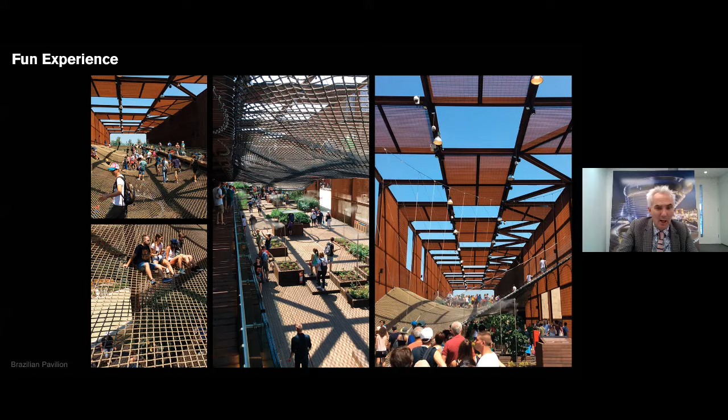So the first thing with any pavilion is a fun experience, an experience that you remember, an experience that you interface with in a fun way — a learning experience, a personal journey. As you're taken through the pavilion, it's important that you come away with a story, understanding the topic of the pavilion. Then there's the immersion of the pavilion, so you feel immersed in a new world, a world about the topic. And finally, a single message, a very clear, strong message from the architectural form, which inspires the question. In our case, that was mobility.

With this particular pavilion, it was really the end of a long journey with pavilions in the expos we'd done. In the Shanghai Expo in 2010, we started with a pavilion designed to be demolished following the expo, as many expo pavilions are. Partway through that process, the UAE asked us to retain the pavilion and whether it could be redesigned and transported back to Abu Dhabi. So we redesigned it, made it movable, and eventually it was moved back to Abu Dhabi. We saw that legacy program as very important.

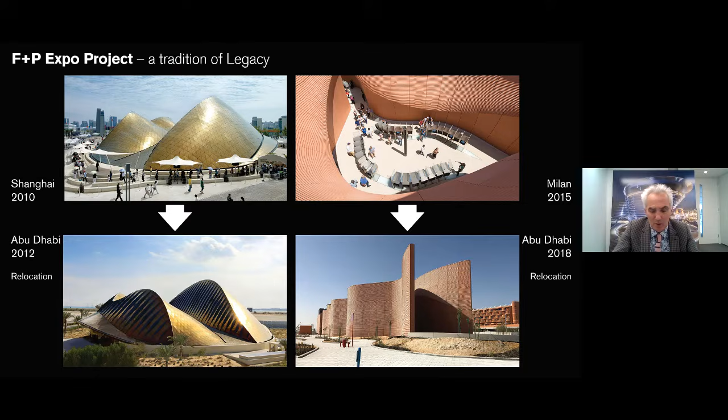The Mobility Pavilion site itself was two things for us. It was a great subject, one we were very interested in, and we think it's become even more topical as time has gone on. The mobility of people, the mobility of data - these have all become very relevant during the COVID period we've just been through.

The pavilion itself is located on the southern part of the site, in one of the highest points, so it looks back down onto the site, and is right next to one of the major entrances. When we were given the brief, there were three distinct areas: the physical world, the digital world, and the unified world.

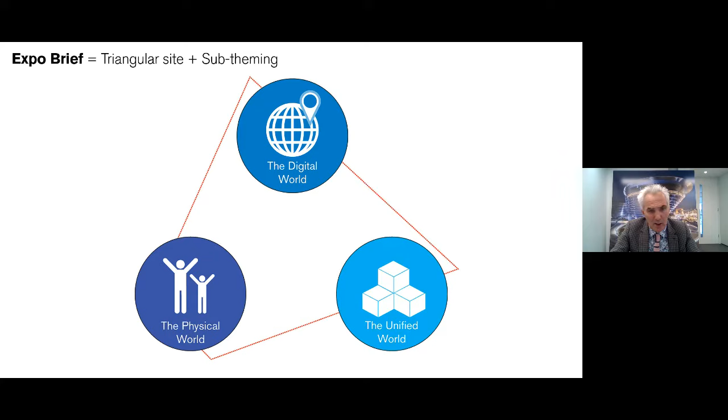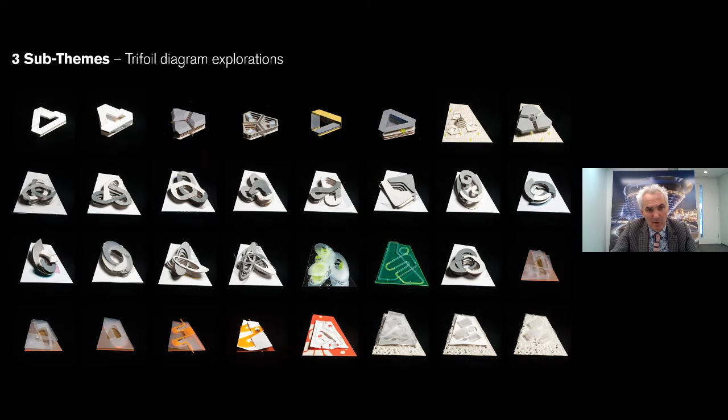With a triangular site, it led us to a trifoil building, creating three vessels, each housing one of the sub-themes of the pavilion. By working through numerous iterations, leading to this trifoil loop of mobility and movement through the building, we ended up with our trifoil form.

So the three legs of the pavilion each have a separate identity, each with a separate show, providing a theatre for the individual topics within.

In addition, one of the biggest issues about any expo is the queuing. As you walk around a successful expo, one of the biggest periods of time people spend is in the queue. Also, an expo is an incredibly exhausting experience - you can be there 2-3 days - so resting, sitting, contemplating what you've seen is a very important part of the whole atmosphere, whether during the day or at night.

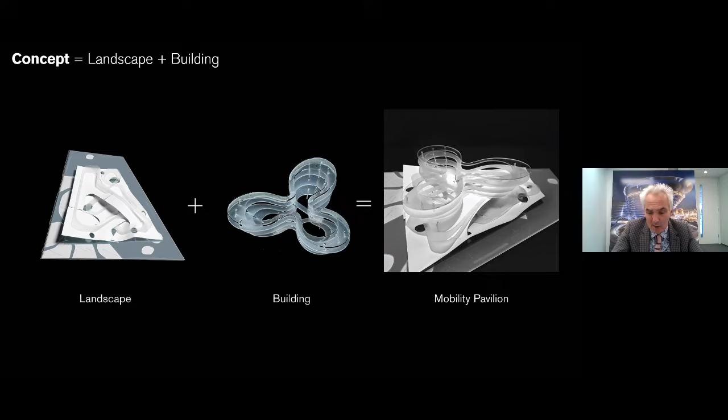So how could we produce a pavilion that sat in a landscape, where that landscape also reacted to the message of the pavilion, in this case mobility? And then begin to think about the architectural forms - how could we express mobility in a dynamic way, so that even if you didn't actually get within the pavilion itself, you could experience mobility from the outside?

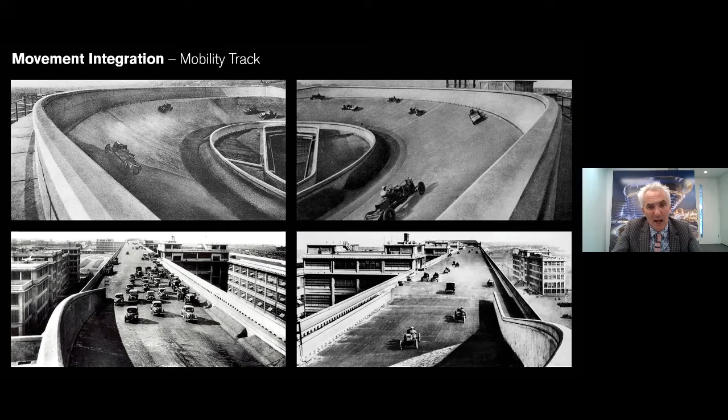Around the site, we have our trifoil building centered in the central part, and around it we have three tracks for demonstrations of mobility devices. There's a high-speed track, almost 330 meters, running around the perimeter, and two slower tracks - a junior track for children - plus two other external areas: the bowl, containing an auditorium space, a cafe opening out onto that auditorium, and a stage for performances during the day and evenings as the expo goes on.

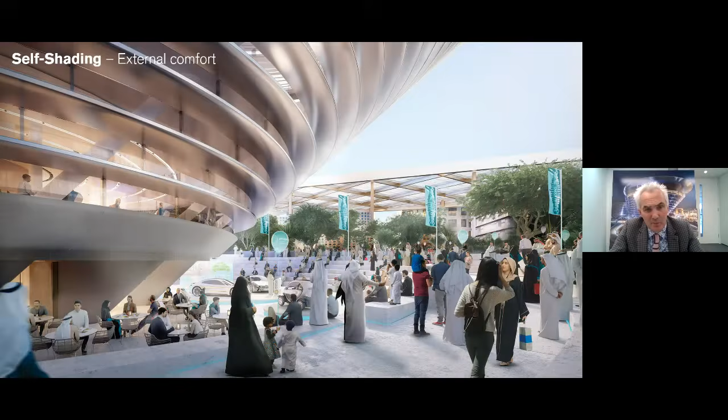Another issue is the climate - we're now dealing with Dubai's climate, 30 degrees or more at times. So how could the building and these external areas also be controlled in terms of shade, and how could we provide shading and an experience for the visitor queuing that would be appropriate in the climate?

The building is raked at an angle of 50 degrees to cut out direct sunlight from the edges of the building, creating a shaded environment. As you can see from these photographs, people can sit and queue in the shade adjacent to the entrance. The building itself forms a shading canopy for the activities that happen at ground level.

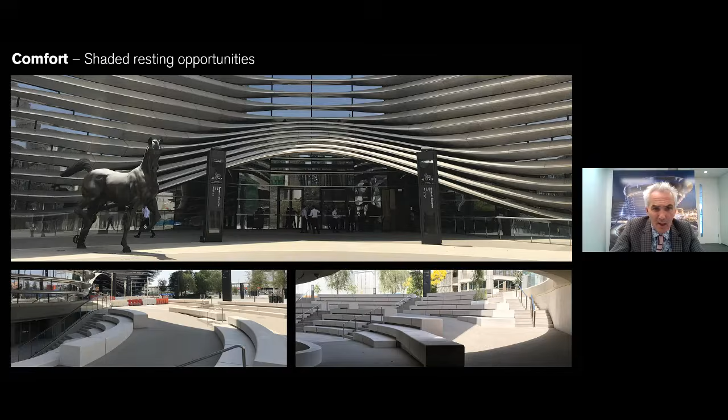The aerodynamic form of the building was really inspired by the wind tunnel, looking at the forms in which air passes over objects, and asking could we use those forms to create a building that was dynamic, almost moving, almost propeller-like? With that came the technology of aircraft manufacturing, the ability to create precise elements for cladding, leading to a more dynamic and moving building.

So we set about looking at the cladding through parametric modelling. We looked at making some repetition within the panelling, and through that created six major panel systems which then sit onto the building. Depending on where they are, the angle of the sun, and where there's solid or glazing, the blades move horizontally around the building, opening or closing depending on their location. The 50-degree inclination of the building cuts out that direct solar impact at ground level.

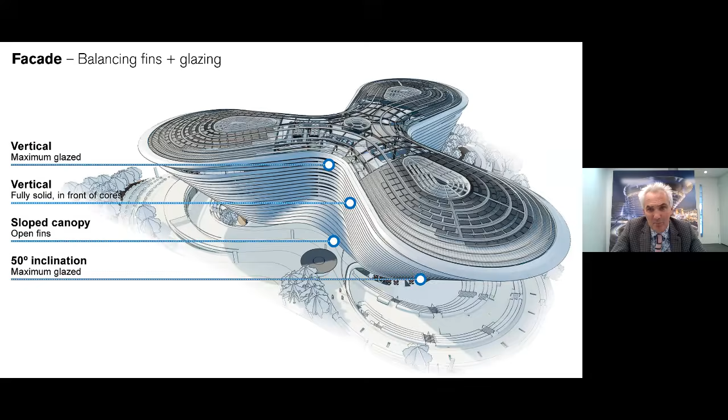That was developed through mock-ups, prototypes, and very detailed modelling. We created a full-size mock-up.

The choice of stainless steel was incredibly important. One, because we felt we needed a material which was robust in the environment in Dubai and had a longevity for the legacy, but also a material that would pick up light and pick up objects around the building. We were very clear that Expos work day and night, and the building should change.

The building should change as you see it at different times. People regularly visit Expos, perhaps more than once, and therefore we wanted a dynamic to the building where it changed depending on the time of day, depending on the mood of the situation, which led to this mobile facade.

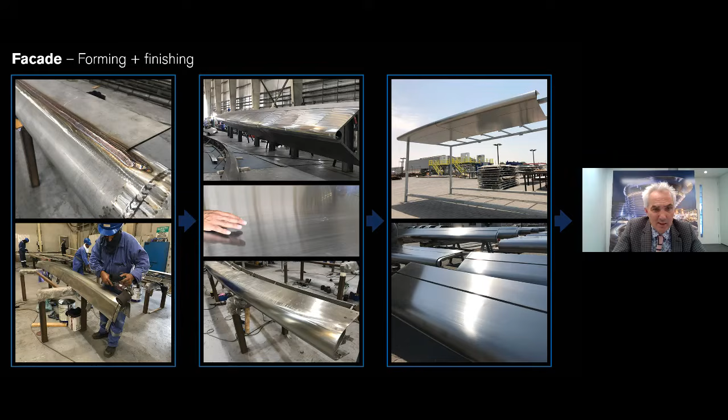The principles of construction are fairly simple really: a tubular form which we could bend to the radiuses required around the building, and then by welding stainless steel plate to that and polishing, we were able to create the fins that you now see.

The building itself is really a composition of light from around the site, with reflections of the perimeter of the site coming into the building, and movement. So the building is all about movement, whether at day or at night.

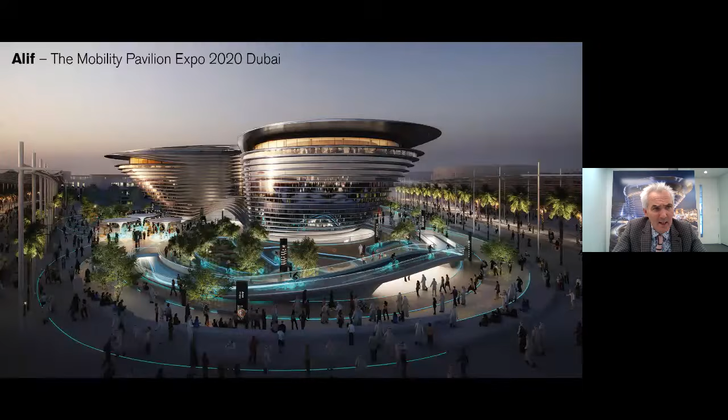And then as the fairground, as the attraction at ground level begins to move, we've introduced further light into that ground plane, into that landscape, in order to generate more and more activity and movement.

Interestingly, as the sun goes down, we see the pavilion changing colour. We see the effects of the Dubai sun moving across the building, a reddening of the building in the sunset. And then as we move to night, a light show begins that revolves around the building, creating the moving facade and building on that atmosphere of mobility within.

So the mechanics of the building, how does it work? Well, we had 30,000 visitors per day in the brief. How do you move 30,000 visitors through the building in a way that won't be exhausting for them? Really, how you control the passage of people moving through the building is absolutely critical in any successful pavilion.

Our diagram in the end relied on this: as you enter, you collect 168 people together, and you lift them in what we believe is the world's largest platform to the upper level, the highest level in the building. As people leave the platform, they transfer and move down through the building through Act 1, Act 2, and Act 3, the sub-themes, and then exit back into the landscape. So there's an active landscape when you arrive, and an active landscape you're delivered into at the end of the experience.

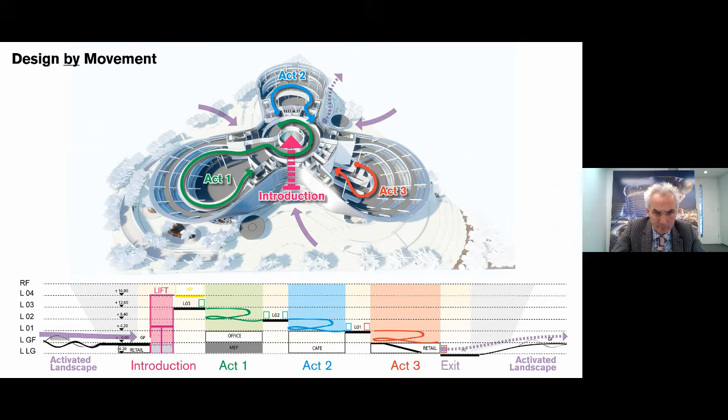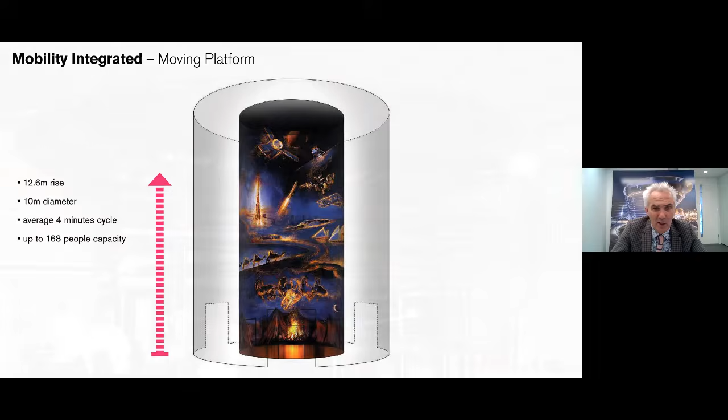The platform itself is 10 meters in diameter. It can carry up to 168 passengers, and as the platform moves up, the show begins, and you're immersed in the show of mobility.

Importantly, the platform becomes a very important element later in the legacy, because the platform is removed and can be reused elsewhere in Dubai, and the hole that is left becomes an atrium within the legacy building.

Now, interestingly, the structure of the building is in total equilibrium. Just as successful mobility relies on an equilibrium of forces, the building itself is in pure equilibrium. The three petals of the building balance back to the concrete core, allowing this hybrid structure which minimizes the material in the building, but also allows for these huge cantilevers at 50-degree inclines, which provide shading for the surrounding area.

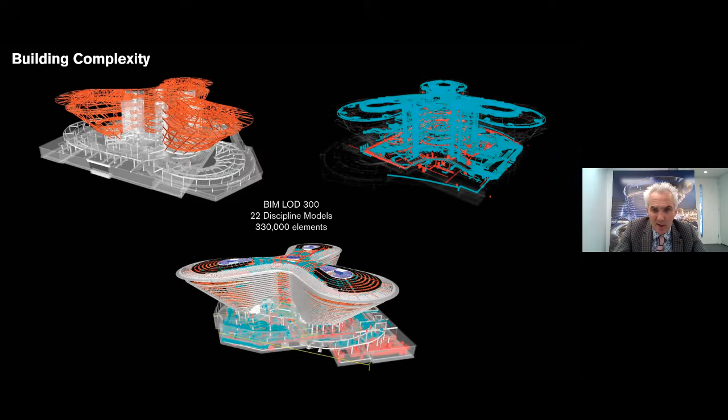The BIM model contains 330,000 elements within the building, a fully integrated architectural process, engineering and architecture really integrating together to produce this building with full integration of servicing.

During the Expo, the digital world, the unified world, and the physical world create the theatre spaces for the Expo to take place. Following the Expo, we infill those zones with more floor plates. That's added to the building. Nothing's taken away. The platform is slipped out of the building and the atrium appears, and that becomes the building for the legacy.

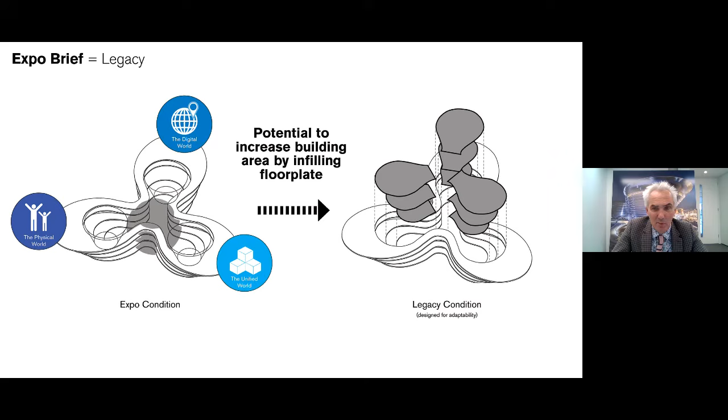You can see this was with the removal of the platform in the middle and then the floor plates filled in. In terms of sustainability, the building is LEED Gold, with photovoltaic panels on the roof, 75% of the hot water demand coming from solar thermal tubes on the roof, self-shading, and 70 credits toward the LEED Gold status. So a very healthy LEED Gold building.

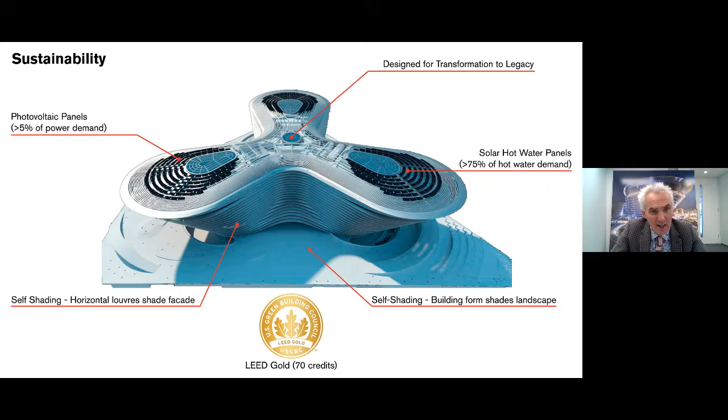For us, probably the greatest success of the Expo - in 2016, when we all stood on the site and said, will this ever be done? And today, it's a reality. Thank you.

Well, Gerard, thank you so much. That was completely fascinating. I've got lots of questions about the immersive experience and how people do a fast track in a 35-degree temperature, etc. But I'm sure lots of those questions will come through in the Q&A. My job is now to hand over...

To Andrew Whalley, who will be presenting Terra, the Sustainability Pavilion. For those who haven't seen this yet, Terra has the highest available accreditation for sustainable architecture, LEED Platinum certification, with 4,912 solar panels, a 130-metre wide canopy, and 18 energy trees helping to generate 4 gigawatt hours of alternative energy per year. Andrew has been an instrumental part of Grimshaw since the earliest days of the practice and has been a partner in charge of projects in diverse sectors, including education, the performing arts, transportation, and workplace. His award-winning projects include the International Terminal at Waterloo in London, the Eden Project in Cornwall, the redevelopment of historic Paddington Station, also in London, and the Experimental Media and Performing Arts Center in Troy, New York.

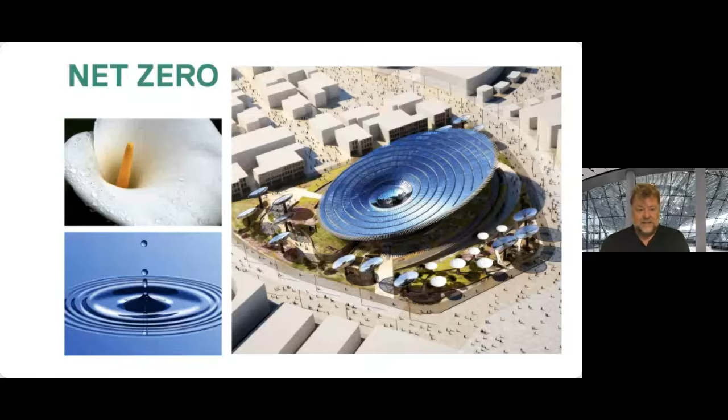So when we came to think about our proposal for the sustainability pavilion, we wanted it to be a net zero solution, which of course is extremely challenging in this particular environment. I think the first part is not the technology, but design ingenuity - what can you do to minimize the energy load of the building.

For instance, how much of it actually doesn't need any conditioning because it can be external, it can be naturally cooled. Probably more than half the building was part of a black box experience - exhibition space that they wanted to control - so that allowed us to sink it underground. The whole site was being regraded, so we could sink more than half the building below ground, which naturally gives it huge thermal insulation.

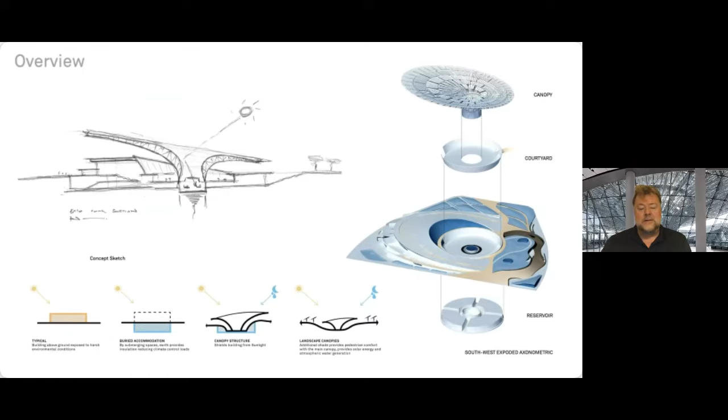And then the rest of it, we took the landscape up and over the building, and that of course also insulates the building. So you're immediately lowering the total heat load on the building - that's the amount of cooling you need.

You can see here from the slide in the top left-hand corner, that's actually the building, and it all sits underneath this sort of landscaped roof, which is occupied as part of the experience and sits in an overall landscape. Over that there's a canopy which basically harvests sun, captures water when there is rain, but more importantly also brings in breezes and cools the large outdoor courtyard. So quite a substantial part of the building is actually external.

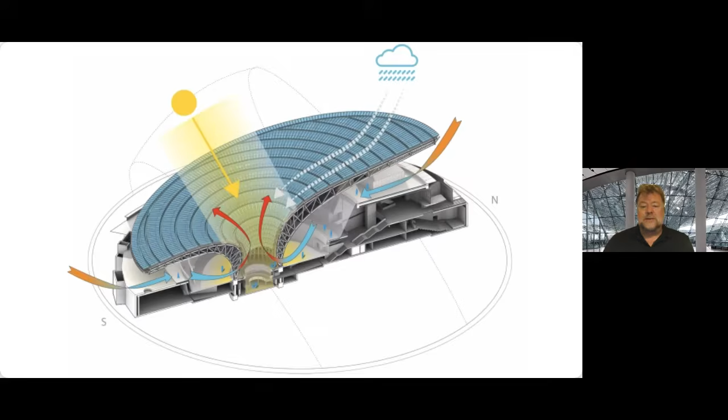I won't go into too much detail on these diagrams, but I think it explains the technical challenge. From the earlier stages, we worked with our engineers, Buro Happold, both on the structures and the MEP systems. This would be what you'd be achieving for a LEED platinum building and probably above platinum, where you're generating already 45% of your energy on site.

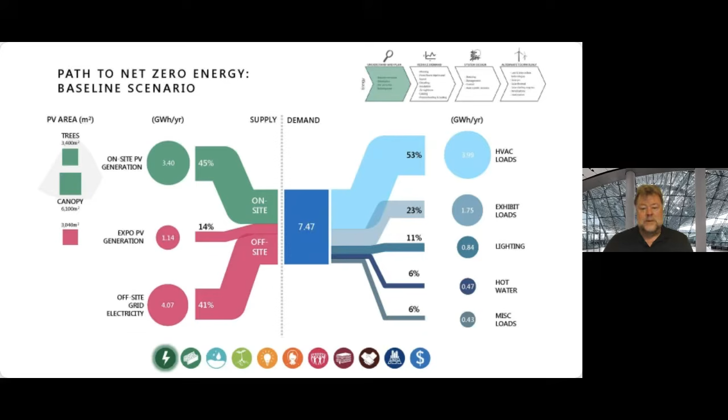So really best practice. And to get to where we wanted to be, this is where we had to get to - in other words, no energy coming from external sources. So we're having to generate 4 gigawatt hours of power. But really what it also means is you have to be very lean on all the systems.

So we were kind of ruthless in where we used energy, and people were given energy budgets. The exhibition designer, for instance, was given an energy budget he had to design within, which meant, for instance, you might have had an idea of using an aquarium, but aquariums are very energy hungry, and also I thought inappropriate in this building. So it steered some of the thinking to make sure we can live within our energy budget.

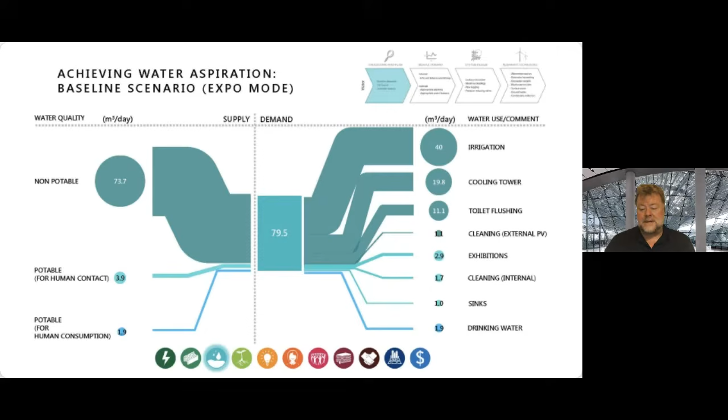And it's very much the same picture for water. Again, this would be the same kind of LEED Platinum Building Plus best practice using potable water, recycling water. And this is what we had to get to.

We had to be very careful about how we use water, how we recycle - everything has to be recycled, how we deal with waste. There's actually quite a high water table, so we have the advantage of being able to use the brackish water and through reverse osmosis, powered by our PV system, clean the water. But more importantly, we capture water - all the water off the air conditioning as we cool the building is captured and then recycled. So it's really about trying to create closed loop cycles and doing things as efficiently as you can.

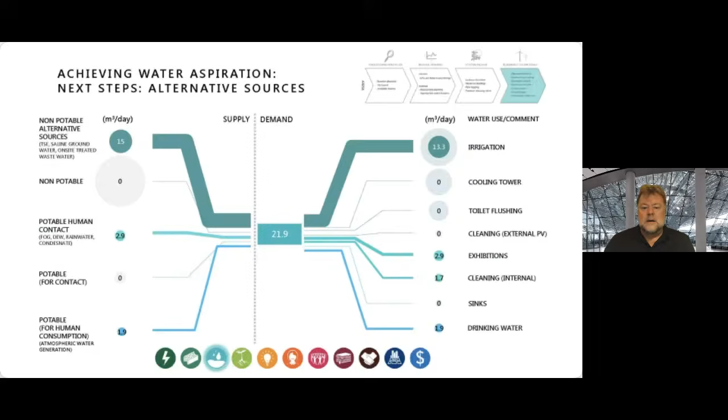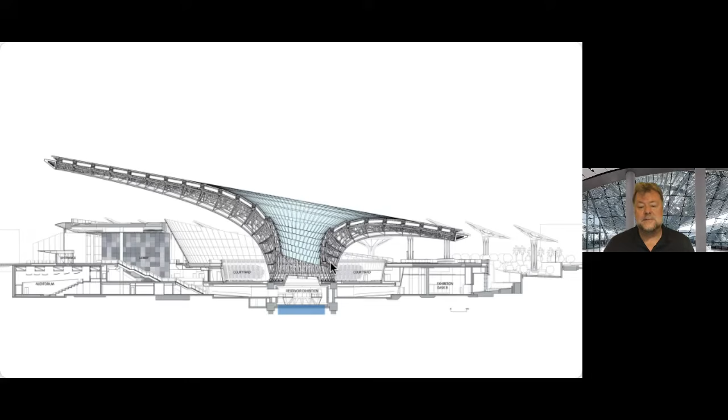However, for Expo, to get more people through, you actually go in reverse. I'll go into more detail - you come in and we use the courtyard to have people circulating and then split them up into different exhibition experiences.

So here we are at ground level. There's the main lobby space and some of the galleries at ground level and the courtyard. But as you can see, most of the building is sitting below ground with all the ancillary and support facilities. Here is the main gallery space that's nestled, and then the outer core and inner core that sit underneath the courtyard.

When we did our analysis fairly early on in the competition scheme, it became very clear that even covering the entire roof with PVs wouldn't generate enough power to meet the energy goals of the building. We thought the landscape also was a very important part of the story, so we came up with the idea of using a necklace of energy trees around the main building that would also contribute to the energy load and help shade the landscape below.

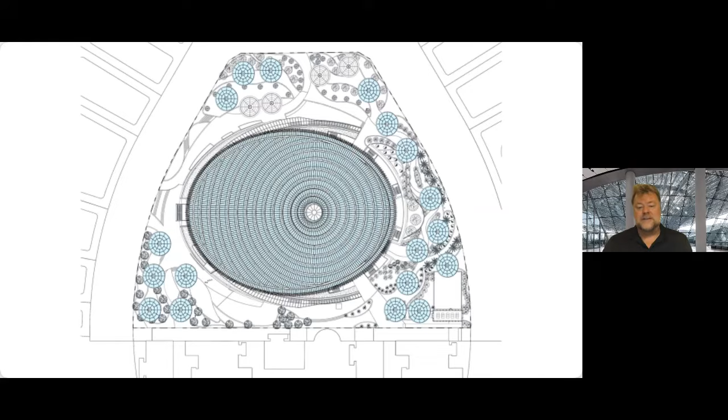From a technical perspective, about two-thirds of the energy is generated from the roof canopy and one-third from the energy trees. They actually generate more power per square meter because they track the sun, which increases their yield by about another quarter.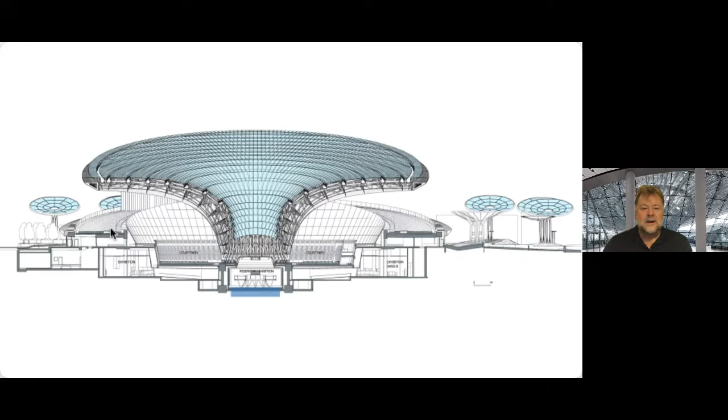Often I think we can find inspiration from nature. The natural world does things incredibly efficiently and often with great beauty and elegance. For the main canopy, there was inspiration from the ghaf tree - these amazing trees that can grow in the middle of the desert singularly on their own with very deep taproots, giving shade to all that find it. That was really the inspiration for the canopy. The cantilever is about 70 meters from the center to the outer edge, shading everything below it.

Here we are, following on a theme - blue flag was mobility, green flag was sustainability. As Gerard said, we all started about 5 years ago or so with a very flat bit of desert and 3 flags basically marking our locations.

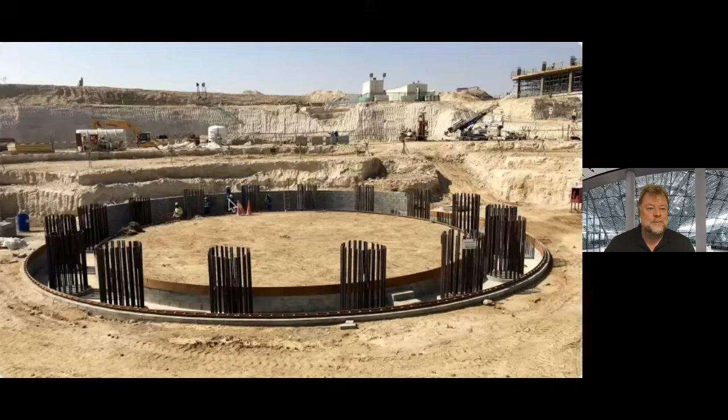Within a matter of months, we got down to the lowest level, cutting down. You get a feel of scale by looking at a person here. The ground's relatively soft, and it was being regraded across the entire site. This is the very base of the Sustainability Pavilion, and this is the support structure going in for the canopy.

When the public come in - I'll come on to this - this is actually now a pool of water. The water is stored in a series of tanks around a central reservoir, and then there's a feature reservoir which you look down into.

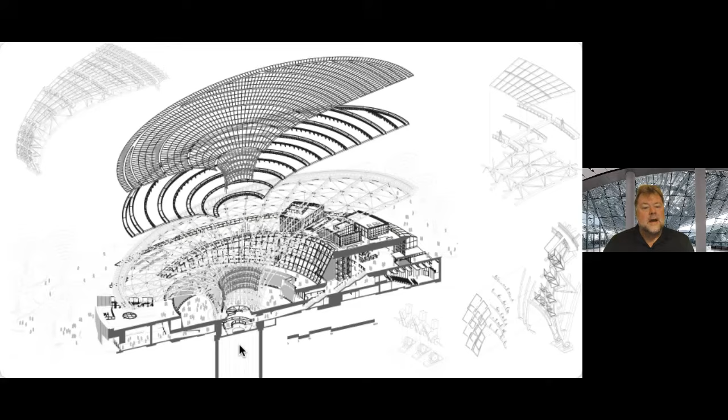So again, a section cutting through, and you can see here there's the courtyard. That was the kind of structure we were seeing at the lowest level. There we go, that's clearer to see. So there's that lower level, and the structure, there's the courtyard and the surround.

Quite a lot of work went into making the building as lean as we could and removing what we could, in particular the canopy, which is obviously the largest structural element, and importantly, a very impactful and visual element. Because I think the thing about expos is that they're there to excite, illuminate, and really move people in their imagination, thinking about the future. So it's important that there is a level of vision. But we wanted the canopy itself to be as efficient and as light as possible.

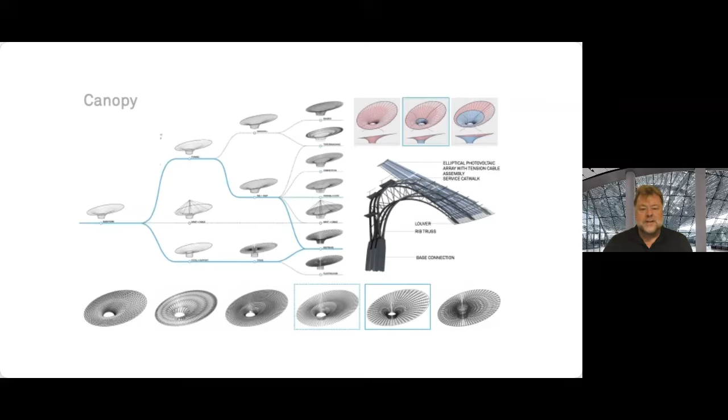So we worked quite hard with our engineers to basically halve the tonnage, thinking about the structure, and also working on a structure that we could use a very high percentage of recycled steel. So there's the canopy and the structure going in place. And of course, the thing about large cantilevered circular structures is they're great once they're in place, but you have to think about how you build them, and each section has to be built one piece opposite the other to balance it out.

Then the PVs that sit on top, we did a lot of research to get highly efficient PVs, but they're also all encased in glass. That was done both for efficiency and safety, but it also has the added benefit that from below you can actually read all the PVs. So for the visitors underneath, being shaded, you get this wonderful view through, and it's almost like a mashrabiya screen.

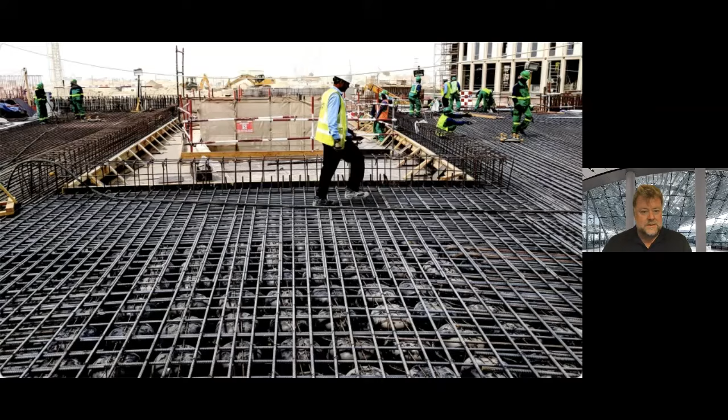You get this sort of dappled light through the PV panels. And then rethinking how we can remove material where we can. This is a system that's now starting to be used quite widely, and this is one of the first uses of it in the Middle East. It's basically using a hollow form in the concrete, which reduces the overall concrete in the slab by about 30%. So the contractor actually likes it because it saves money, but more importantly, it removes a massive amount of concrete. And of course, concrete is our biggest challenge as far as the environment goes with its carbon footprint.

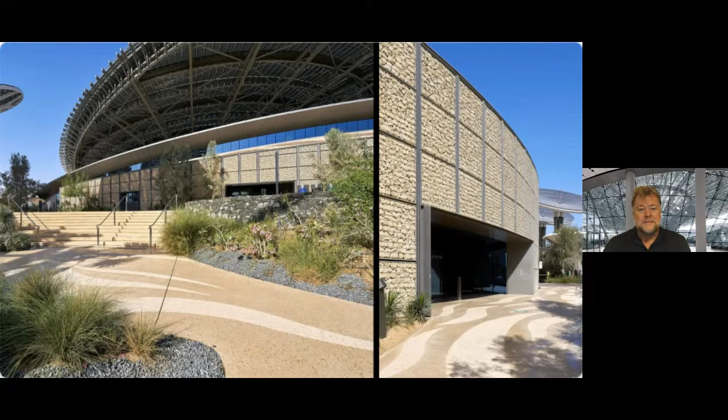So we're working quite actively on alternatives to Portland cement in the concrete mix. Then around the building, we also try to use local materials. So all below that landscaped roof, the cladding is all in these gabion baskets, with rocks found quite locally. You can see that they're the same color as the rocks that were excavated out of the site. And so that gives enormous thermal mass to the building, insulates it, but I think it also gives rather a wonderful kind of texture that sits very well with the landscape around it.

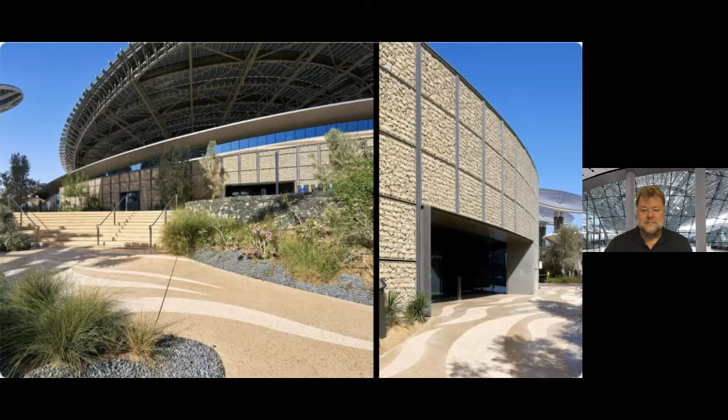So for us, we had to design it in a way that would allow us to introduce this gimbal so we could move it. And they're quite large, 20 meters across, so it's actually quite a large structure. In the end, we found a company very nearby that specializes in carbon fibers. They're actually made about half an hour away from the Expo site, and it's a company that does a lot of work with marine work and yachts. It actually works with Foster, I think, on some of the Apple stores. They have an amazing kind of technology that allowed us to make these very lightweight structures.

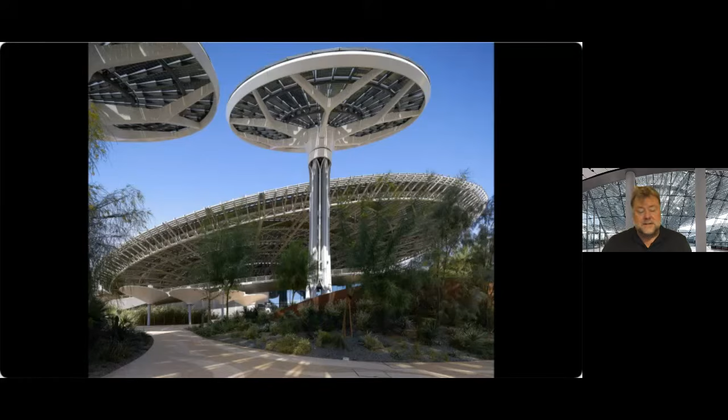So you enter the building and the site through the landscape. This is part of dealing with the very large numbers of people visiting, we hope, and they actually explore the landscape before viewing the building.

We worked with our long-term collaborators, the Eden Project, on a whole series of narratives for the landscape, and a very talented local landscape firm called Desert INK, who have great knowledge of local plants. A lot of research was done trying to use plants that haven't been used before, that need very little water—a sort of xeriscape—demonstrating you can create incredibly impactful landscape using the minimum of water. Hopefully the landscape will tell new stories.

The one on the right is a favourite plant of mine, very minor, but it's called a halophyte, which is one of the few plant species that can grow in brackish salt water. There's a lot of research going on, for instance with NASA, looking at how you can grow plants in the desert that can actually produce fuel and food, because it just needs salt water and sun, which is the one thing the desert has plenty of.

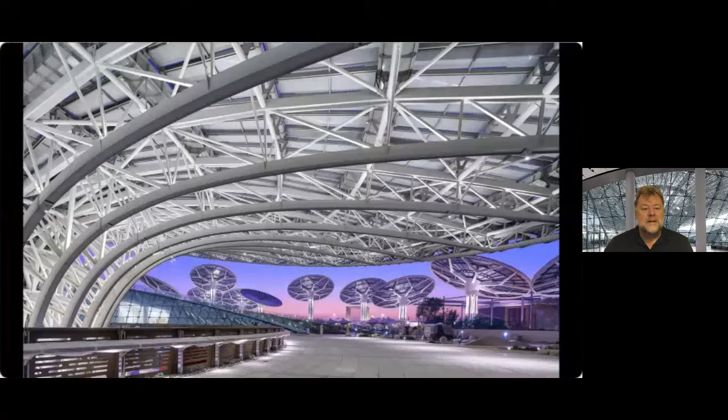After making your way through this landscape, you come underneath the canopy, and some people will just go through the landscape and look down into the canopy—that may be their experience. So we wanted to give them an experience of the site even if you just walk through it.

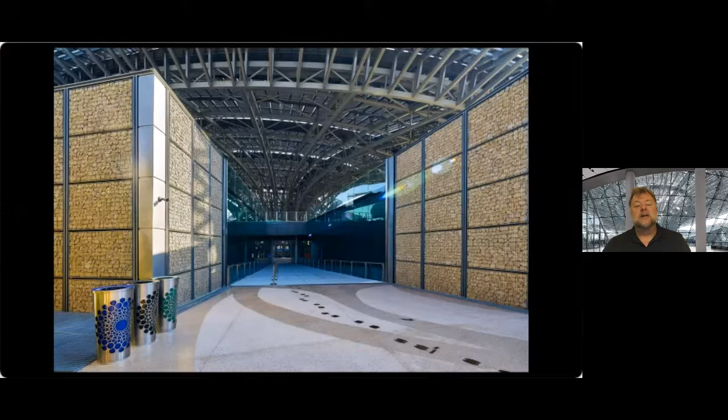But hopefully many visitors will take the time to make their way down through the dry riverbed and come into the courtyard. From there, you make your way into the central courtyard, where there's a whole series of different experiences and exhibits.

For Expo, what we've done is split it into two, so you make your way around to two different halves. By doing that, we can get more people through, but still have a really good quality experience.

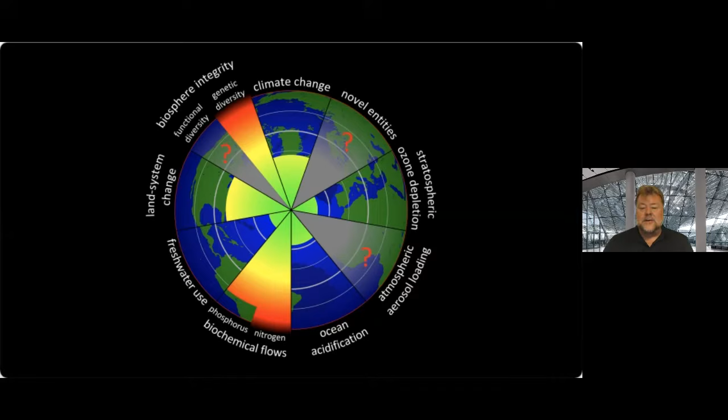For the exhibition, we worked with the Eden Project and the Stockholm Resilience Centre. The themes were the planetary boundaries that Johan Rockström has been advocating as a way of understanding the stresses on our planet, turned into a kind of analog, immersive theatre.

It's very much an experiential process where we go through two halves, starting with under the forest, through the roots and trees, or under the ocean—followed by a whole series of quite confronting at times, but hopefully thought-provoking experiences.

After you make your way through the exhibition, you then come into the outer core, which takes you round into the very heart of the building, right at the centre, which you can see here.

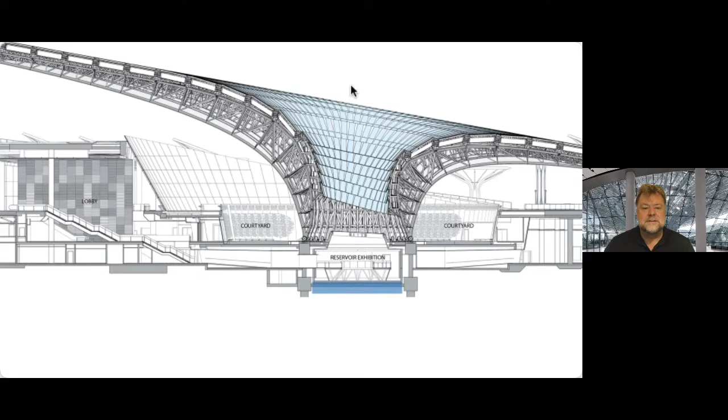From here, you can actually look up through the building, through the oculus, and see the sky, or look down to the pool of water. There's a wonderful new kinetic sculpture that's just been unveiled, at the heart of that experience.

As you come out, there's another lobby, and also a space for lectures, debates and discussions that will be part of the long-term use of the building. All of this is made using recycled wood.

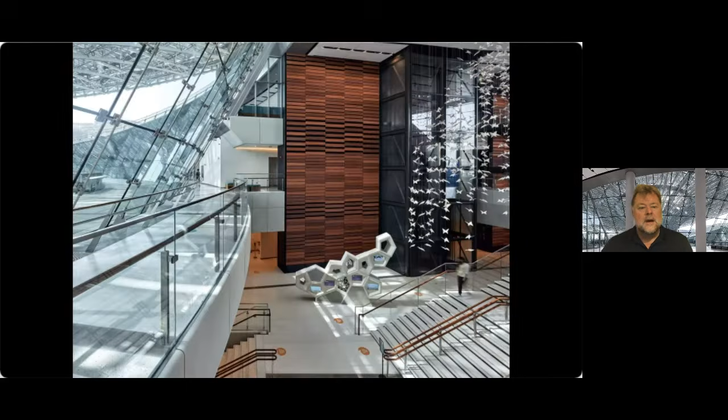And you then come into the lobby, as you make your way up into this space.

Of course, all of that is a sort of reverse experience of what you'll have in the long term. Throughout the building, we've worked with a whole series of artists, mostly from the region, and you make your way out through the main atrium space up to the upper level.

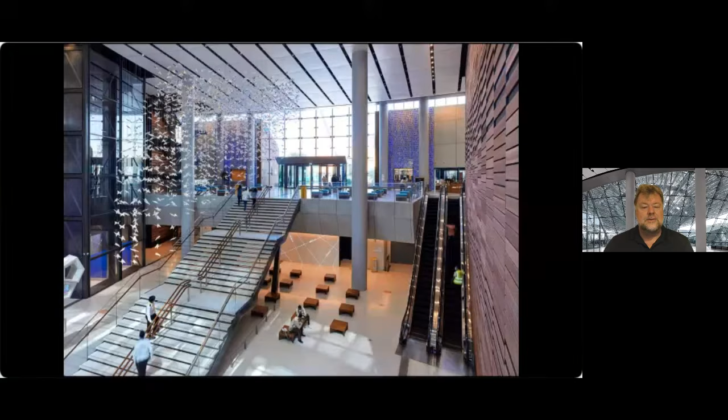This is where you'll start your journey rather than finish it, when the building becomes a permanent building. You'll enter and your view will be this way, looking out to the canopy, and you'll then disappear underneath and experience it the other way.

And I think the one thing is: you don't get a good building without a really good client.

Expo could have said, well, we'll do PVs, but we've got a big solar farm nearby, so we can have half of it poured in, which would be, from an energy perspective, perfectly doable. But it would lose the magic of demonstrating how you can do everything in a self-contained way.

Our projects were led by Her Excellency Reem Al-Hashimi, who is the joint chair of Expo. And Marjan was really an advocate of everything that we did and gave us great support.

I think ultimately, why are we doing this? The United Nations has made it clear, and there's a conference coming up in Glasgow this November, that we all must be designing carbon net zero buildings by the end of this decade. This decade is an absolutely critical decade. So in many ways, the Expo opens what could be the most important decade for mankind.

We committed a couple of years ago that all of our buildings would be net zero carbon by the end of the decade, and we're finishing 4 more this year. In fact, we've brought that forward to 2025 because we want to get to regenerative design by 2030.

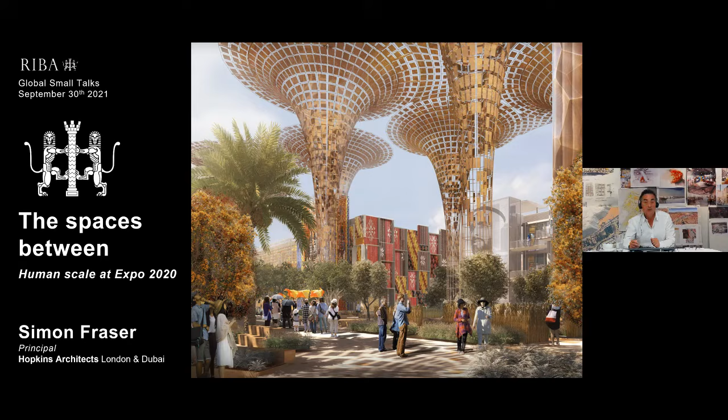Thank you, Joe. And thank you to Gerard as well at Foster's and Andrew at Grimshaw. Those are lovely buildings you've got there, really exquisite. So, yes, I'm going to talk about the thematic districts, which take into account probably about 150,000 square meters in footprint, and overall about 350,000 square meters. We arrived really at the beginning of the project, and we were one of the first to join Expo on the work.

At the beginning of the project there was really just sand being moved around. It was a blank canvas in many ways. That's probably a photograph from one of our first meetings when I was trying to show these spaces with some shade structures above it. They said, whatever you do, don't take any photographs outside, which I did. It was an amazingly dusty and empty site, which Gerard and Andrew have referred to as well. When we first arrived, it was quite a surprise, and it's amazing to know how they've finished Expo in this period of time, because it's going to be an amazing Expo.

A little bit about my story. I used to travel through Dubai in the mid-70s, early 70s, on the way back from Hong Kong, where I was born and brought up. Dubai Airport, this is Terminal 1, which is still there. It's a lovely original building, the first airport. In the distance, you can see the creek, Dubai Creek, and the Bastakia there.

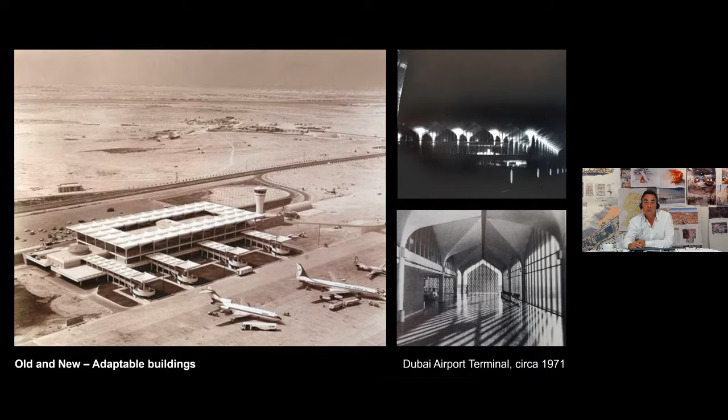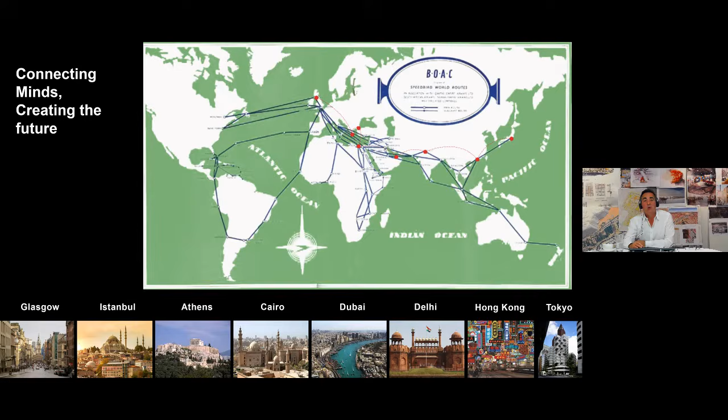An old friend of mine, Peter Jackson, showed it to me again in the early 2000s when buildings were still being demolished. Hearing bird song, no cars, just pedestrian streets, is a real inspiration to this. I think this is something we called to make it an Emirati Expo, the Emirates, to be part of that. It's very much, I think, in people's hearts.

Creating a sense of place is really important when you create something like an Expo, because many of them are, as Andrew and Gerard have referred to, have become quite desolate places after they're finished, and they're not sustainable. So looking at the Bastakia itself, this organic courtyard, a series of courtyards and streets, was something that we proposed as the basis for our buildings.

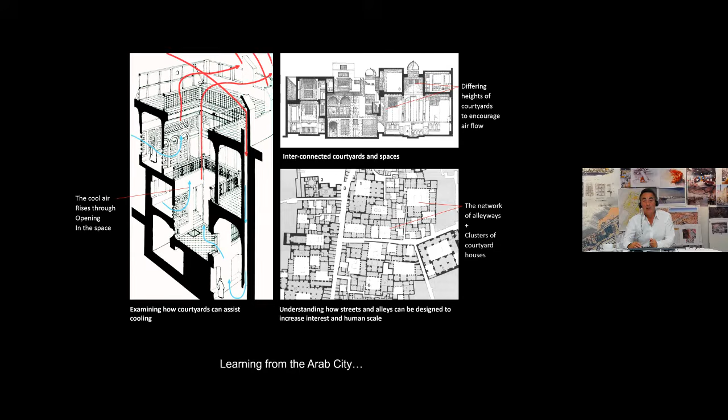There's a lot of beauty in the historic Arab city. That's an aerial view of the Bastakia again, and particularly something close to my heart, across the Gulf on the other side in Iran, in Isfahan, and other cities like that. You can find these incredible souks and meandering streets - a different series of spaces, all pedestrianized, and this quality of a route from one place to another, which we wanted to try and imbue in our Expo project, in our master plan for it.

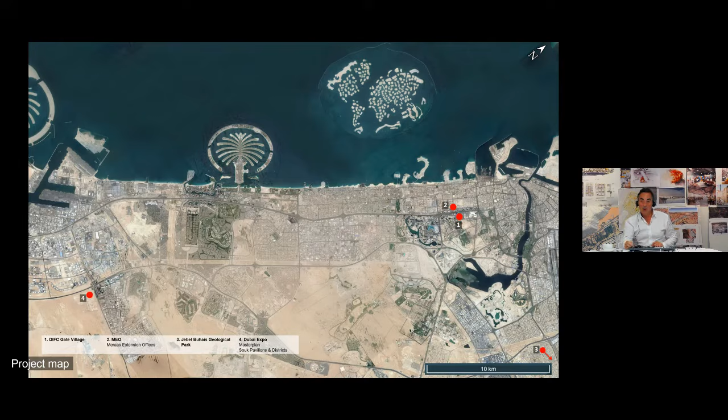That's something I want to return to as we go on. But to talk about the thematic districts themselves, this is a plan of Dubai from around a few years ago, within where you see the red dot 4, that's the Expo site. You can see the Jumeirah beach on the top side there, and towards the creek, the top right is where I've been talking about the Bastakia, the origins of Dubai and the creek itself.

So when we arrived, there was, as I said, a very plain, blank site. You can start to see the edges of the city encroaching on it, on the edge of the Expo site, and this rapidly started to become something we were building very quickly and resolving issues as other people joined in. As Andrew and Gerard have said, it was a competition, and the proposals for the thematic districts from other competitors were larger buildings, and we wanted to try and fragment them down to get this core idea of these natural streets.

So you can see some of our early sketches in the bottom corner there, showing the permeability and the routes through to try and connect through. We didn't know at the time about Grimshaw's project or Foster's project or any other projects at the time. Those hadn't been selected. So what we were trying to do was to create an urban district which could adapt.

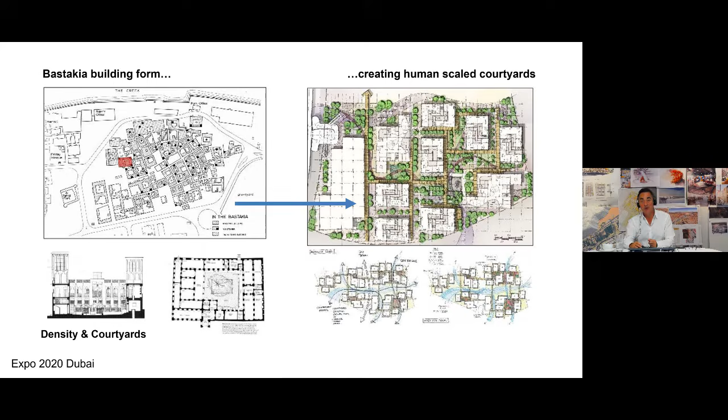And actually, as it turned out, parts of the site were chopped off so that the other buildings could be incorporated into it. And they matched them very well. And that's something we all worked closely together to do.

And so before we had shading structures in the center of the space, there was just trees and a series of courtyards to get those things to work as well. There's a car park below, which will be used for other things in the future, not just a car park, but to get them to all align through, we have to think carefully of that.

And you can start to see the top corner there, an identity for another site, which would then be incorporated.

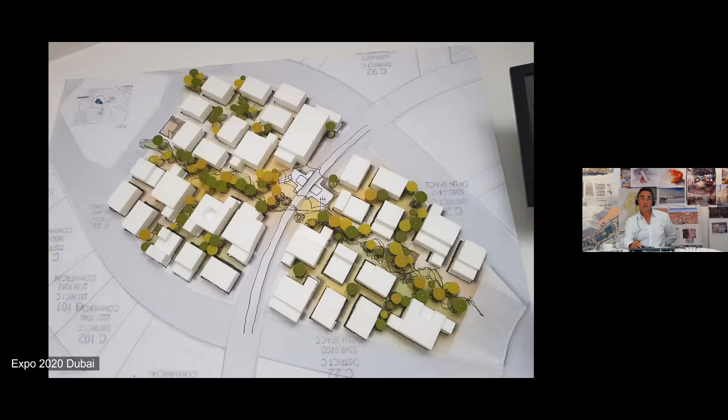This is an early sketch I did to show the types of streets and spaces, try and keep the streets as narrow as possible, centralized spaces for natural ventilation, for potential PV cells on the roofs and things like this, and to incorporate that. So that was a pretty early diagram we had here.

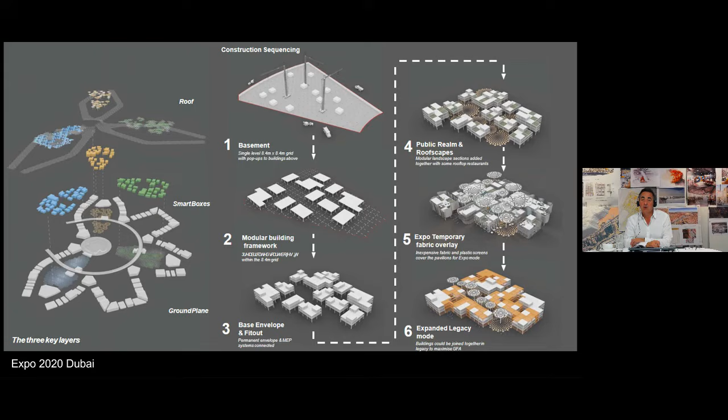We had these different layers of the fragmented boxes, really, essentially, of the buildings with the spaces in between. And then you can start to see there the shade structures on the top right-hand side. And this was an element where we had to sort of mix around things and move things together as we went along.

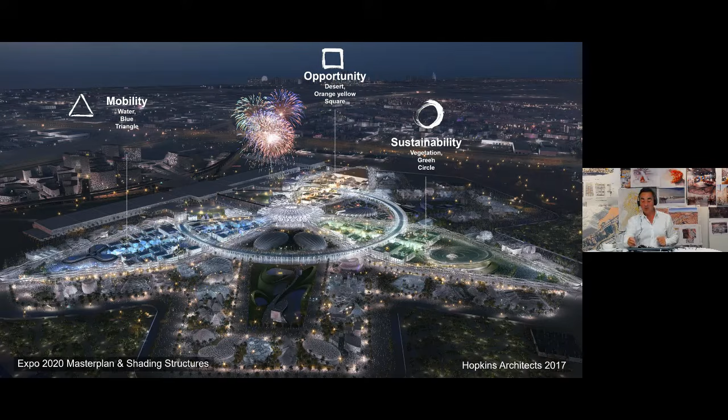And this was an image we created just as Foster's and Grimshaw had completed their concept designs, and we incorporated it into this aerial view of what we were proposing there for all the streets and spaces in the main Al Wasl Plaza, which was a lower dome building. They eventually went on to build it as a larger building in the end.

And then this was, I think someone's actually put this on a speed thing. It's moving itself.

This was an early idea of the shade structures, very, very light shaded spaces, and then all the different pavilions with the characteristics of the countries as they'd come along. So these were one of the larger spaces in it.

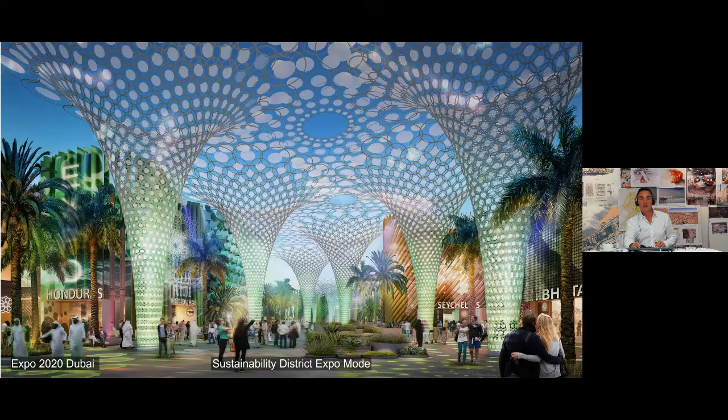And then these were some early ideas we had as well for sustainability. And we had come up with this idea of a square, circle, and triangle to try and identify the different spaces, the different districts. And that's something we showed at our concept design or post-concept design there for the space.

And then as we developed it up further, pavilions themselves could come along, countries could come along and personalize them with a wrap, as we call it, an external layer of additions to the buildings, which could provide more identity. And then these could be reused as well for other buildings later on, these elements, but they come off the core central building.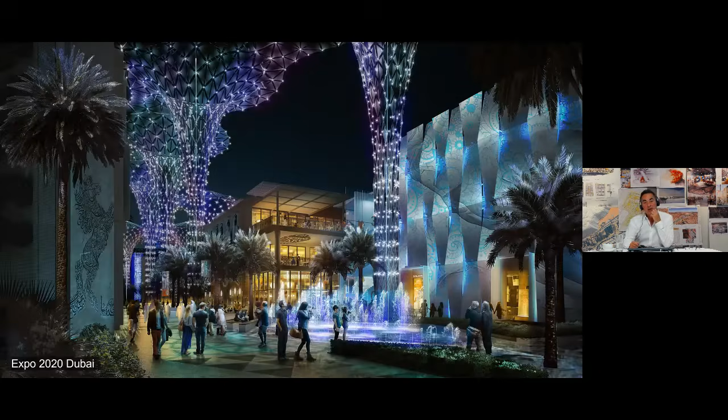These were some night views of the space, because a lot of the time these buildings are going to be used at night. I think it's going to be open to 2 a.m. as well, so predominantly a lot of things will happen at night. Something of interest to me at the time was making sure the streets of these thematic districts are not too bright, because in many ways the buildings Hopkins designed are supporting other fantastic buildings by Foster's, Grimshaw, and all the country pavilions, letting them be more expressed.

I was working on a project in Tokyo at the time, seeing the central areas of Ginza. You get this incredible bright light on the main streets, which is like the Expo main streets, and then suddenly you take one or two streets back and come into really nice human-scaled streets. That's what we'd like to achieve for the thematic districts - a place where you can sit out, have a coffee or something to eat in smaller streets, and take a break from the big events happening around.

So these are the kinds of feelings we were designing for at the time, working with Speirs and Major, our lighting designers, to get the lighting levels as low as possible on the structures. Hopefully when people are going around, that's what they'll feel - a kind of retreat, a place to go away from the main buildings once you get that museum fatigue, and take a break in these smaller spaces in between.

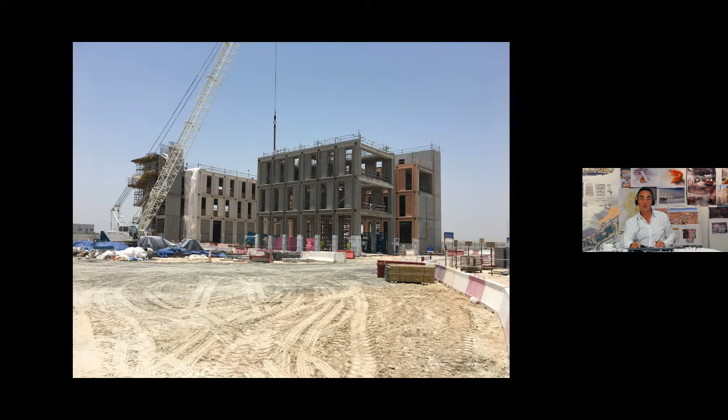I hope people can see the proportion and rhythm of the original Bastakiya districts and how we've tried to incorporate that. We tested this out on a series of mock-ups where there was nothing else on these buildings, to work through the junctions. Eventually this became one of their media centers for the Expo, and they started to occupy and use them. We were looking at different types of concrete, different plant species, water fountains, different ways of using these wraps to explain the different countries and identities of the pavilions.

So that's the base building there, with node points which things can be fixed onto, and that will eventually become the legacy project once all these wraps have taken off.

It's a real achievement for the team - a whole group of people working on it to get these things on budget and right. It's incredibly tight budgets, I'm not joking - just a little bit more than a reasonable car park. We had to work carefully to get the proportions right, the detailing right, and this was all working with local contractors, local companies, just virtually a few thousand meters from the site.

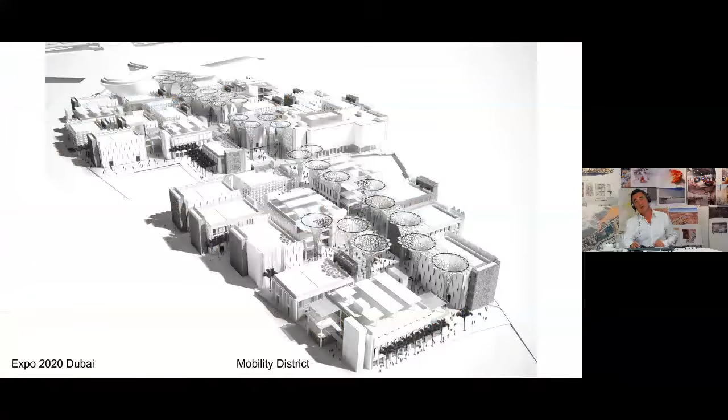It really was an inspiration to us to see how you could shade the streets with that speckled quality of light. This is a slightly more developed post-concept design showing all the different types of local species of plants and the shading structures as they start to be developed. You get that quality of the main shading structures through the central streets, and then side streets off which are very tight, narrow streets leading onto that central route. You can see the Mobility Pavilion in the distance there as it leads up towards it.

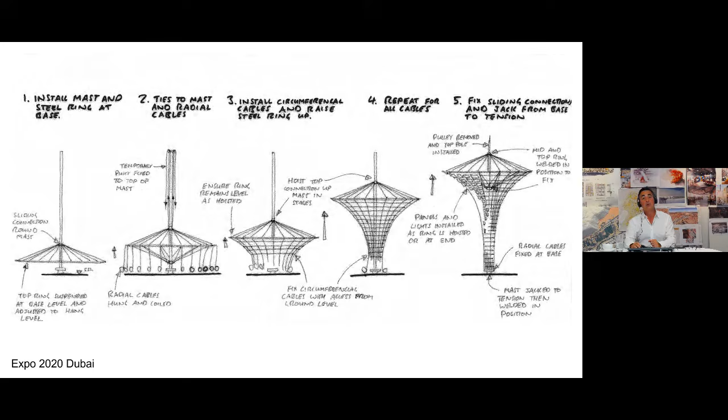This was an early image where we were starting to think of discs in space, working with a really great engineer, Steve Webb. This is his sketch, and with us trying to encourage him to use as little material as possible, he came up with these really good sketches for how the buildings came together, how the shade structures came together.

They really are truly light. And as always with Steve, he pushed it right to the edge. We got this incredibly light structure, to the extent that the masts and everything started to move with a breeze. People were calling up saying the shade structures are moving, because they hadn't been tied together yet. But they were incredibly light panels, which all individually move.

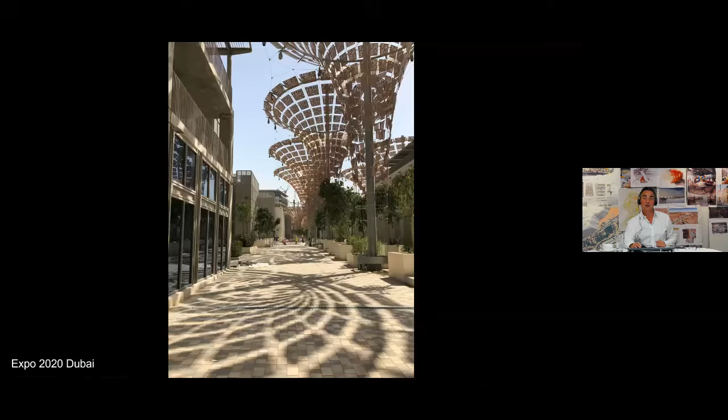The up view, looking up into the spaces, you get this quality of very, very light structures with a pattern of light on the buildings and on the streets. You can see the square patterning relates to one district, circle to another district, triangle to a different district, and you can see that as we go across.

This is some of the stair towers looking out, service towers there, and then most of the buildings starting to really be completed, and you can see the whole project coming together. I think this is actually about 2019, late 2018, 19.

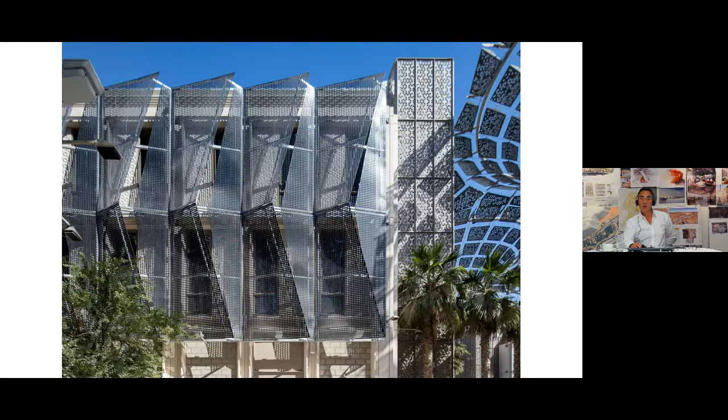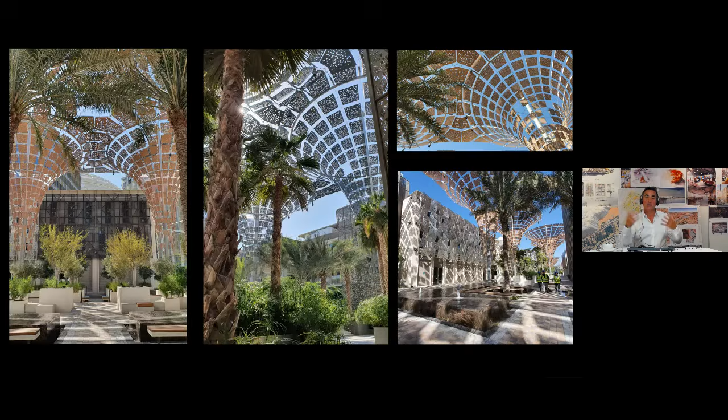Some of the wraps coming on there, which will then have screen printed images and colors on the buildings to identify the different countries, added on there. And then some of the spaces coming to fruition as well. Gradually, as they get much more planted and start to grow, they become very, very lush. Last few slides here, some evening shots with the lights coming through.

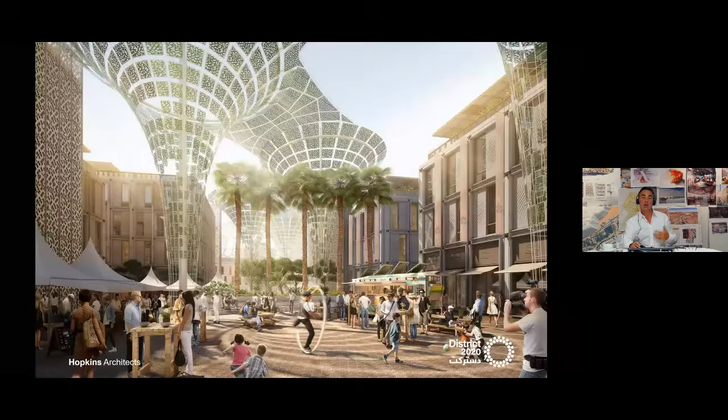And then finally, as Gerard and Andrew have also mentioned about legacy, this Expo forms part of the new airport that's nearby, which will be a logistics city. That legacy component, which Andrew also showed the same image of, is something we've been working on to convert the buildings as soon as Expo is finished into apartments, places for people to live and work, small startup businesses, and things like that. So that's what we've been working on as well for legacy.

So it really is an Expo that's going to continue on and be a proper piece of city. All those Expo buildings are going to convert into these smaller apartments as time goes on.

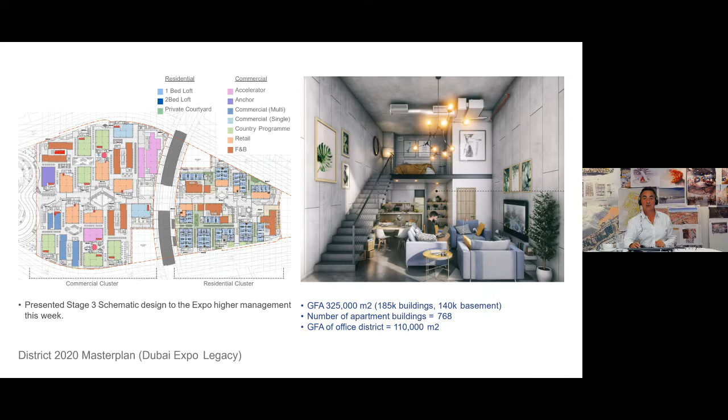Joe? Simon, I'm not live yet. Simon, that was great and very timely, thank you very much. Yes, sorry about that. No, you were doing good. Time is moving on.

It's very inspirational. I'm now starting to get itchy feet to travel, which in a post-COVID era would make sense, to actually go and see these buildings. Very inspiring, thank you very much. We've got some great questions in the chat, so I'm going to move on to that so we can get some discussion and Q&A going.

One question is, how do the various pavilions talk to each other, given that they're so close to each other but are different thematically? I'm going to come back to you, Simon, because I think you have a slide, and what we haven't seen today is how your buildings and the Foster's and Grimshaw Pavilion sit in a site plan. Could you answer that for us, Simon? Yeah, I'll try to. Let me just get back to a plan. I think there's one up here.

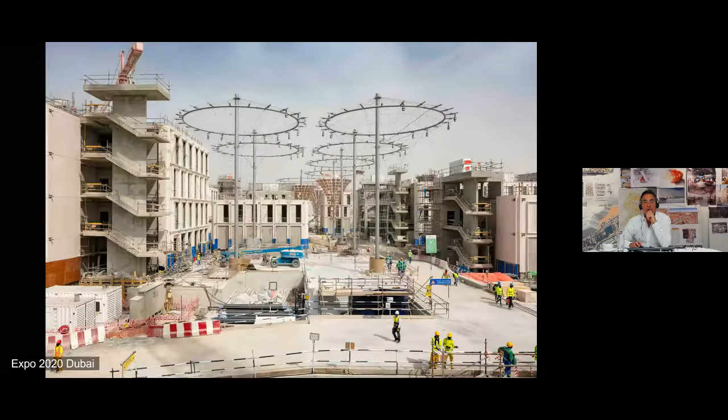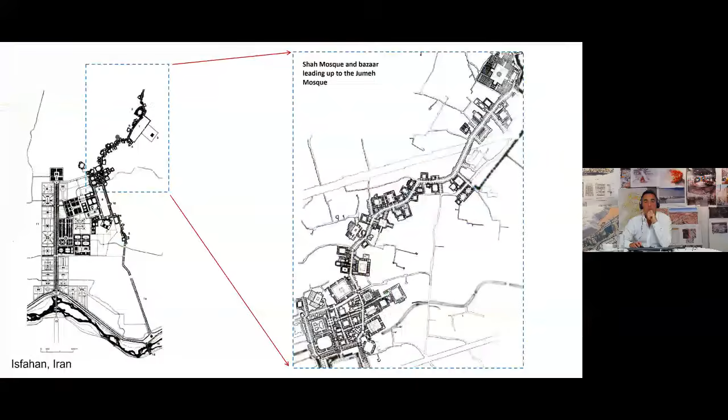While you're getting back to the plan, the next question I'm going to ask is about the carbon footprint of each of everybody's projects. So that gives a little forewarning to the other two people on this call to prepare their answers.

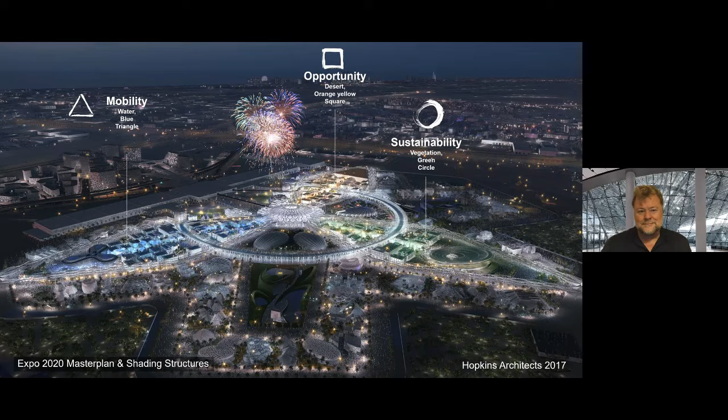The next question is to Gerard at Foster's, about whether your building will be still fully accessible when this platform for 160 people at a time is removed in its legacy state.

Yes, 100%. It's fully accessible. It has additional lifts, and they will be working. And I think what's very important is that it's accessible for all through the same system, not only during the expo, but also after the expo. You can move around the building internally - it has ramps to move down through the building. So the building is really truly open to everybody, and that was something that we felt was very important, was that there was no prevention of anybody moving through and seeing the whole experience.

So yes, it's a seamless experience through ramps and through the platform during the expo, and it transforms into a similar experience afterwards. But the tracks all stay, so you'll still be able to trace back. Yes, it'll be very interesting to see how they get used later.

Fantastic. Okay, so there's another question which is about, for Andrew, I think, which is about carbon offsetting. What carbon offsetting has been required in order to reach net carbon zero?